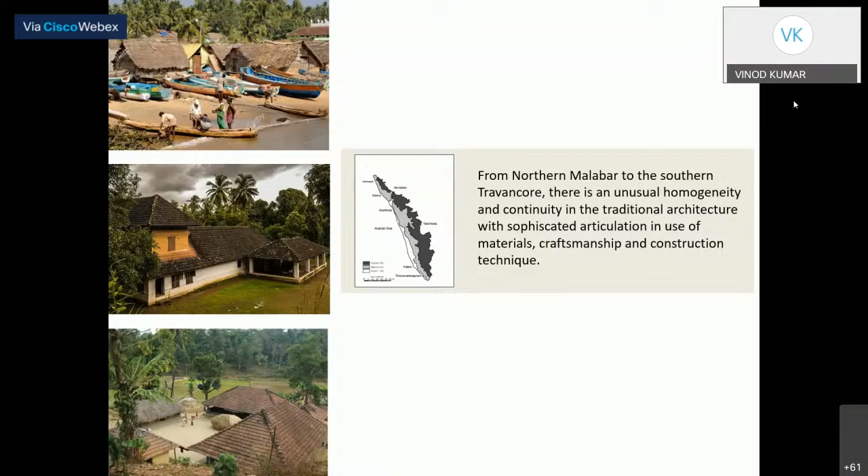And if we go from Malabar to Travancore, there is a continuous continuity in tradition. Of course there are variations with respect to materials used, but we follow a general common pattern. We also had a very clear picture of monsoon, almost 110 days a year, which followed certain patterns. Today we don't have such strict patterns because of climate change, but yes, it's part of our lifestyle and culture.

And sacred groves were part of our landscape, and it's also kind of giving space for human beings. So we give space to spirits, we give space to animals, plants, whatever. So it's just giving some space for people or for things to exist.

This we had done long back, 2002. This particular grove in the picture is from Ravi Varma's place in Kilimanoor. It's a huge compound where there is a very interesting grove. And this is again a temple. It's to show the temple landscape where you can see the groves and landscape, or the structure which fits into the landscape well.

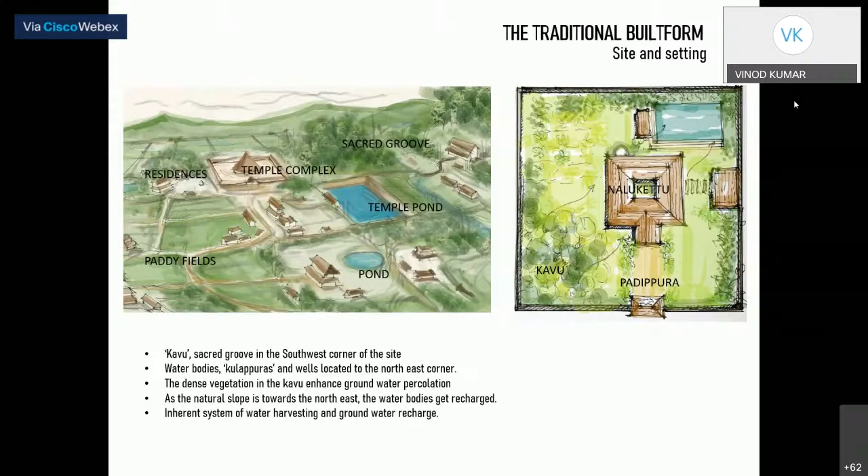And this is a typical structure of how we were planning. The sacred groves used to be in the southwest corner of the site, water bodies in the northeast, so that it allows a natural filtration and recharging. So all these things were kind of inherent in our planning systems. And it's the same whether you talk of a village or a residence. It's the same kind of planning system which they followed. It kind of integrated with the human population.

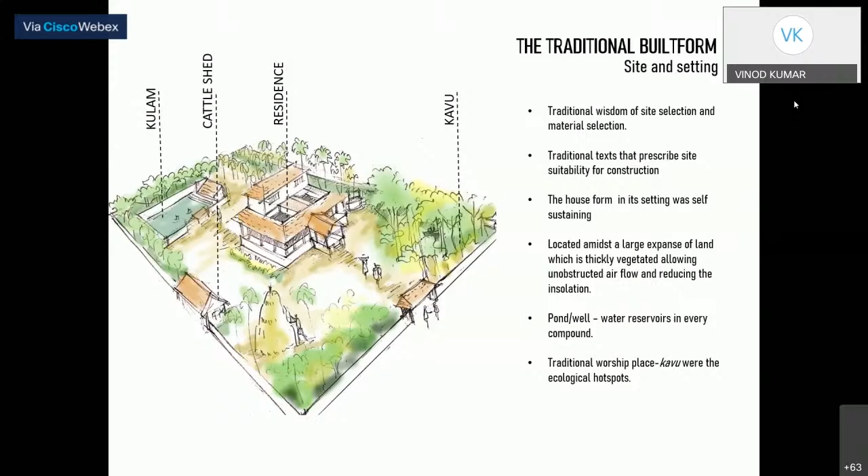We had clay tiles, granite. These were the basic materials. Now, when you talk of tile roofs, the Mangalore tile is only 150 years old. So we had thatch before that. We had country tiles. So we can't really say that the Mangalore tile roof is Kerala architecture. It's mostly come from Europe, but still the form, the slope, these are things which were there earlier too.

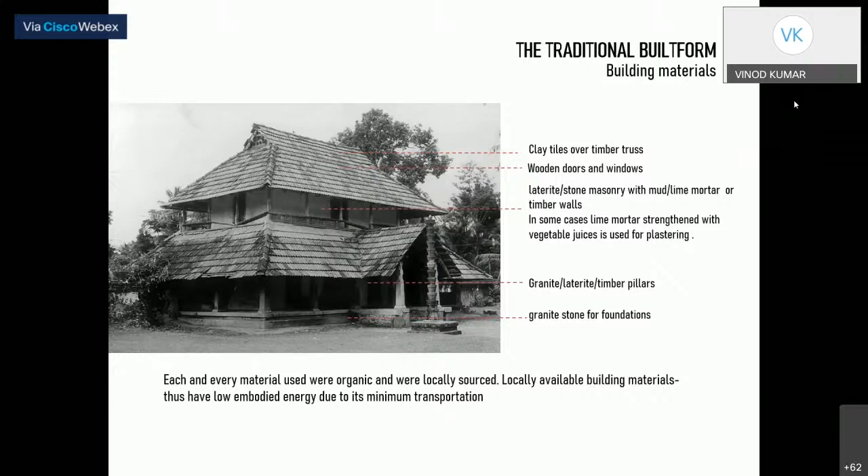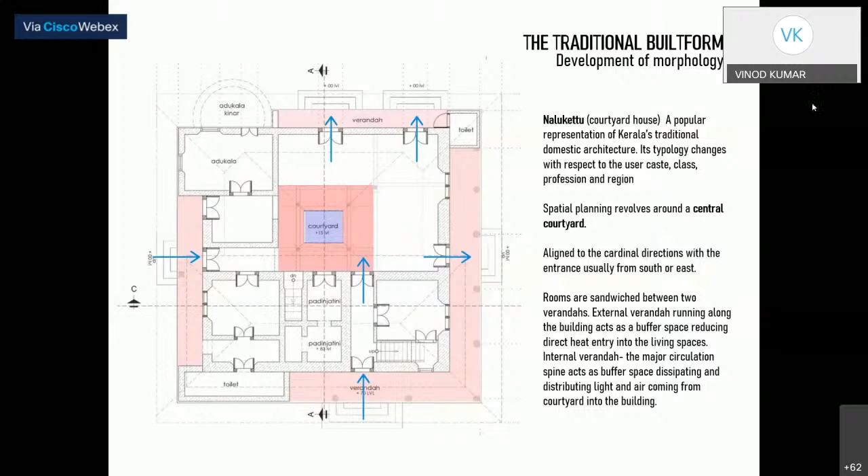And we had proper hierarchy, and then there were systems of flow. Sometimes courtyards were there, sometimes courtyards were not there, but still it allowed the breeze to flow, to protect the house from overheating. So these were natural systems which we followed while building. And you can see this is one house which we had documented: Ekasala, Dwisala, Thrisala. I think these are things which you all would be knowing. So we had systems where the design took care of natural flow of air and breeze.

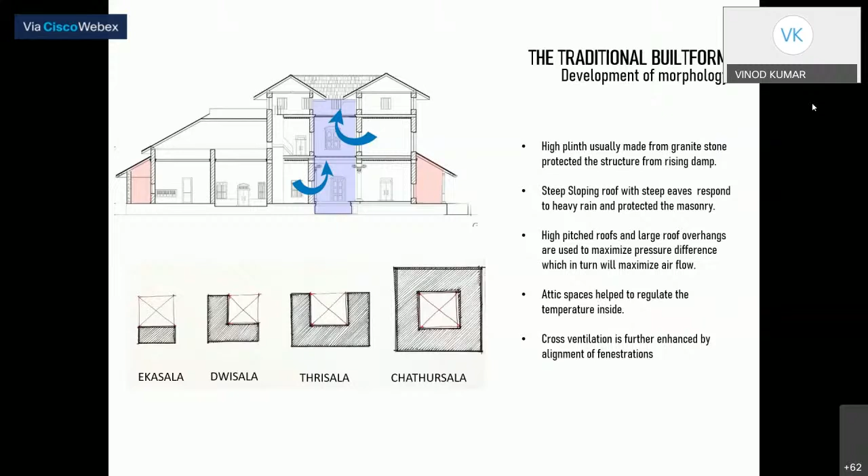And this is one house which we had documented, and you can see it helped for the natural flow of air, breeze, and how it went along with nature.

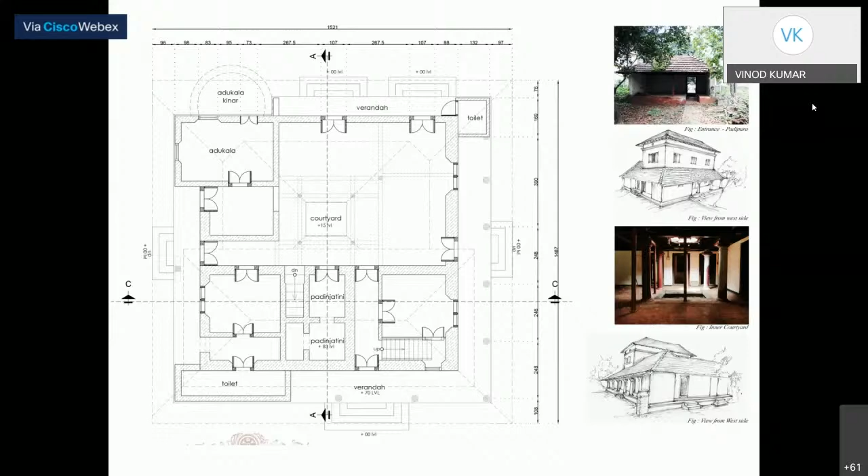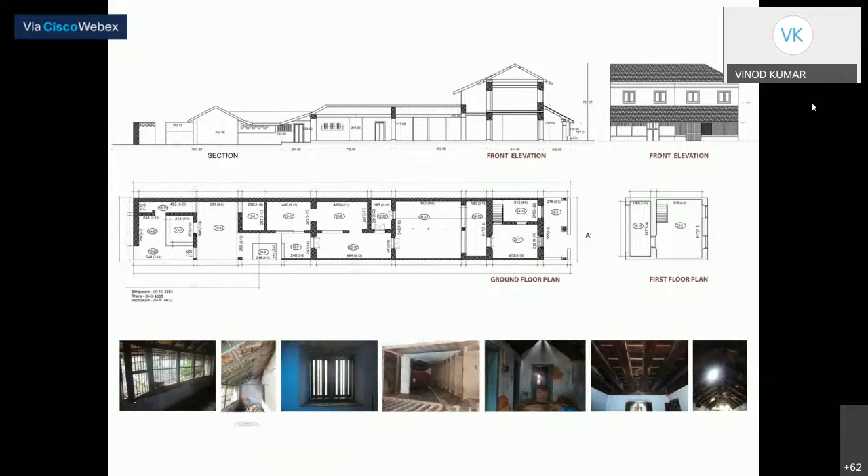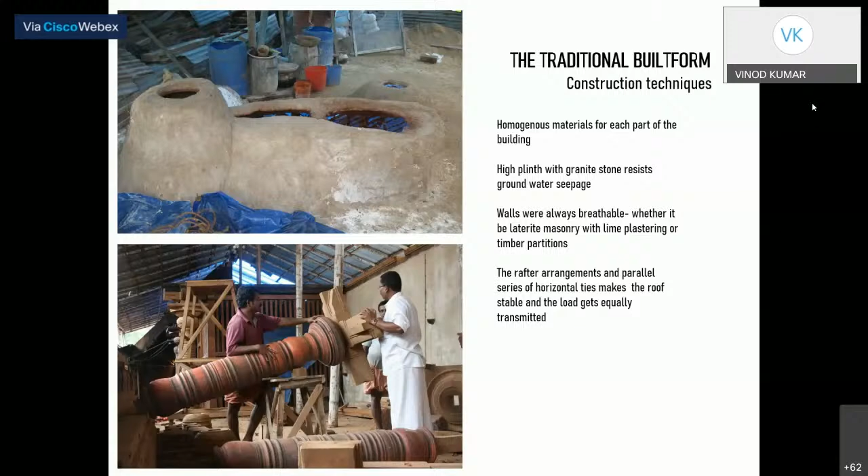We had verandas, attics, wooden lattice, these beautiful kulappuras which allowed the breeze to flow in. Even small things like handrails allowed the breeze to flow in. Being very high in humidity, it was important for the air to flow. I think allowing the flow of air was the most important thing. And shades. These are very basic things of climatology, which our traditional buildings followed pretty well.

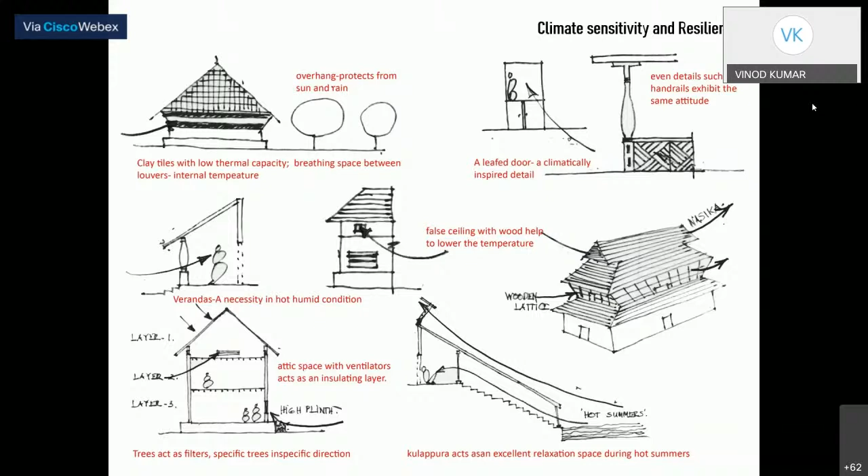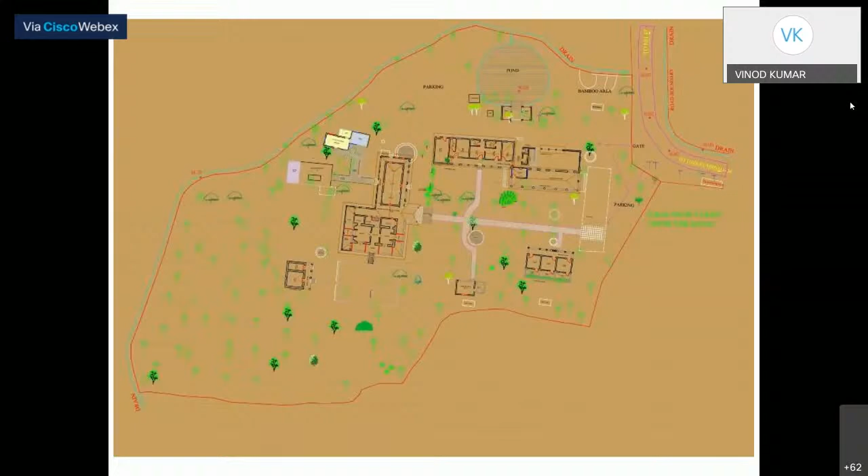Okay. And now we come to the problems we had because of climate, because of our own carelessness, things like the flood which Kerala experienced for 2 to 3 years. Why or how that flood happened is something which we need to look at. After the floods, what was the impact? We could figure out that the traditional structures fared better than many of these modern buildings. Even buildings with laterite and lime fared far better than a lot of modern structures.

And what are we building now? How is it being built? It's something which we all need to question ourselves. Are we meant for such buildings? Is our state meant for such buildings?

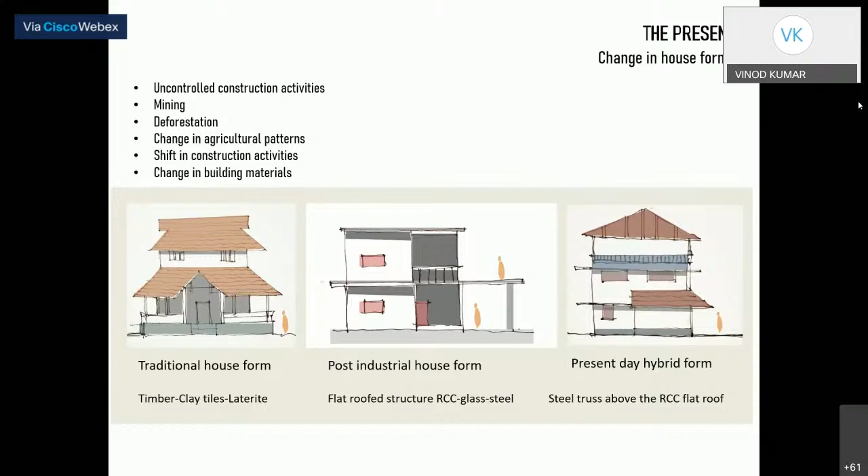How do we say we will have a sustainable future? What are the things which we can do? It is something which we should learn from the past, from our systems, which we have to learn. And now I come to some of the old examples and things which we already spoke about.

A courtyard with a, this is a Mullattaran, nammal parayunndu. It's a jasmine plant, which again adds fragrance to the courtyard, and you can see the shading and the light and the breeze which comes into the house.

This is a mana called Swarnath Mana, and this is Shaktan Palace, which we did early in 2002 to 5. We did the landscape of this place, a heritage garden, where personally I got introduced to the plants and the landscape of Kerala for the first time. And we had planted almost 500 species of plants. And I guess that's again something which you all should think at the bachelor level, where the students can be introduced to the plants or the landscape of Kerala.

The building, and this is part of the landscape. These are some of the seatings which we had done as part of the project in 2002 or 3. And we had a group of sculptors working with us, including people like Wilson and Alex Matthew. And after the project, many people thought it was built during Shaktan Tampuran's time, which was a compliment for us.

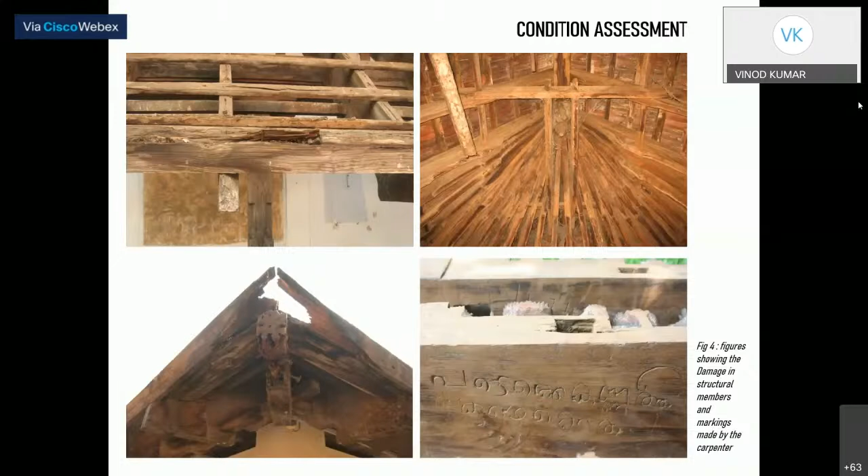And you can see some of these, like, the sculpture was covered by lime. So when we removed the lime, we could discover the sculpture again. Many such things happened, and you can see the traditional tools. Why I'm showing these things is, how much do our students learn these things? And again, what is our understanding of traditional architecture? It's something which is very critical.

I think we do documentation in colleges, but we hardly do any detailed analysis of the documented structures, or of the traditional spaces we had. What happens many times is we do the documentation or practice traditional architecture, and directly we start building Nalukettu, or we start copying the old structures, and then we don't develop. So we have to learn from what was there, what kind of spaces they created, and what functions they served for that population, and then we have to build for our time and age. I think that's very important.

And this is a section of the temple complex. You can see laterite, lime, then again stone is used, copper is used. So this is a typical section where you have timber, copper, lime. These are the materials, and it's pretty sustainable. When you're talking of climate change and sustainability, I think it's very important to understand.

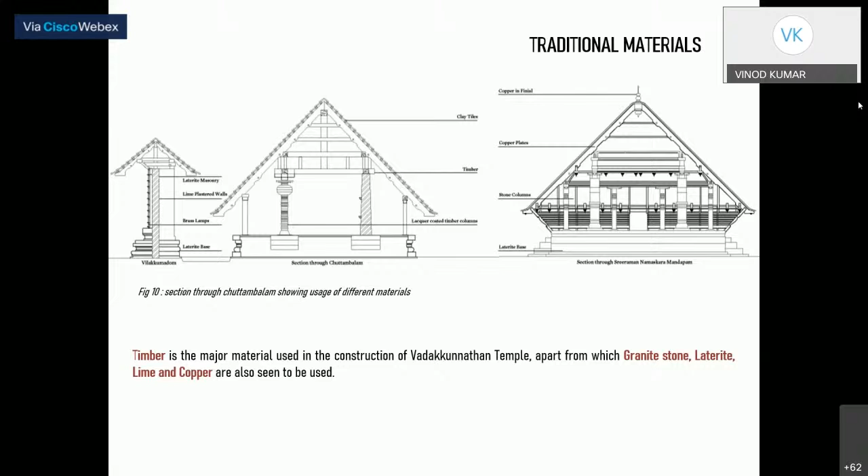Okay, now when we talk of things like lime, this is lime. India still has a lot of lime, but all the lime is being taken by cement companies, which are huge. So finally, when you go to the market and look for lime, you might not get lime, or you might not get lime workers who are skilled enough to work with it.

It's become super expensive. It's around, I would say, 1 to 10 times. If you can do something with cement in 100 rupees, lime has become 1,000 rupees. So how many people can really afford it? So something which was so simple, so common in our land, has become uncommon or rare. I think this is something which we have to really look at.

And again, when you work with lime, a lot of these old lime structures, it stands 600 years. We still have houses which are 250 years old. Many of the cement structures, we still have not done enough research on cement, but a lot of structures we see are breaking down in 30 years, 40 years. So we need to do more research on these materials.

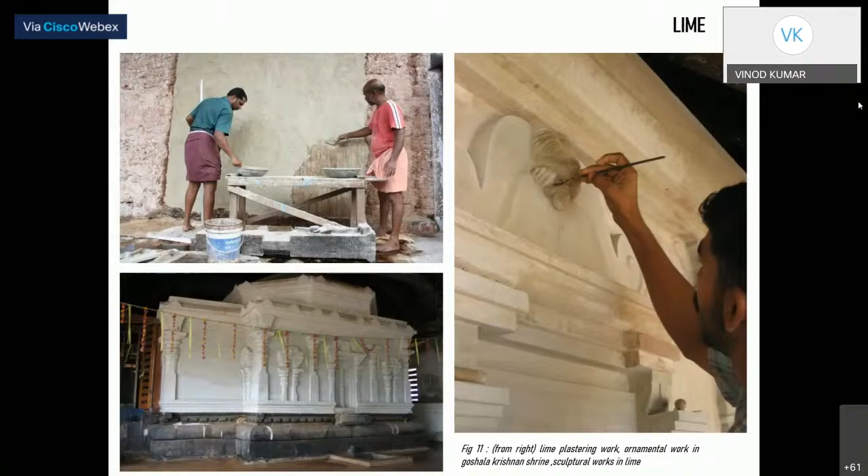One thing is for sure, lime is a breathing material, and it allows air to pass through. It's more comfortable, it's more eco-sensitive. So these are definite plus points for the lime. And this is how we made it. We had people who knew how to collect the raw materials. Some had to be collected from forest kind of lands, and then mixed, and then you keep it for 15 days, and then finally after that you start using the material.

So this is a know-how which our villages or our people had, but sadly we don't have it anymore, or things become easier. It's just like how you make an Ayurvedic medicine. Now for making an Ayurvedic medicine, you may have to get ingredients, mix it. Ideally you have to make it at home and then prepare it. Now you go and buy a paracetamol. It's something which you can just go to the shop, pay 10 rupees and buy and eat. But if you say which is better, it's a question which we all need to answer.

And this is copper, how copper was used. You can see we had reused old copper. And copper again, it's a material which was used in Europe in the 13th, 14th centuries. So when we did a bit of research, we found that a lot of copper has come from Europe in these old structures. But now in the green architecture, what we try to follow, they say copper is a very green material.

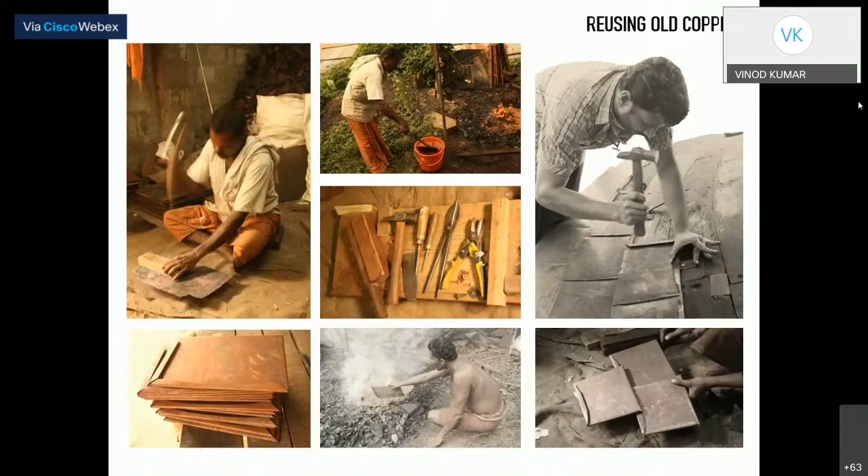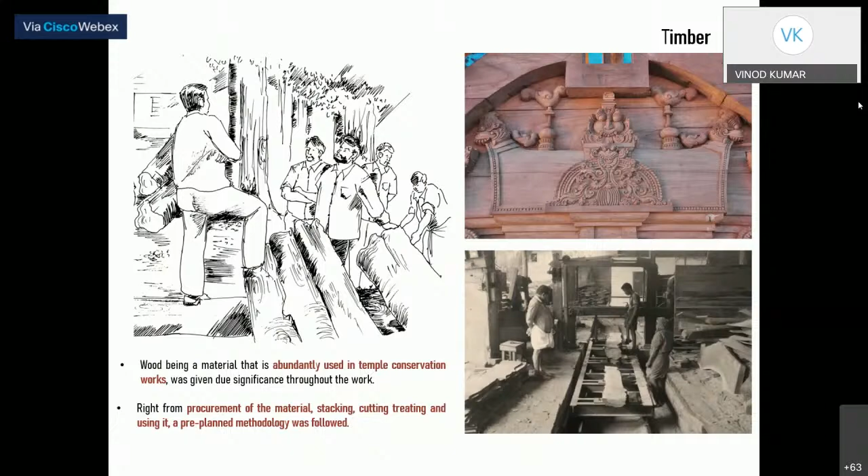And this is how wood was brought down to mill, and it was designed with timber. And this is how we worked with the local craftsmen. For this whole project, we worked with almost 500 craftsmen or 500 workers, most of them traditional workers. So I think such projects are important also for the knowledge to be intact.

Unless and until we give them work, they will get into other works. Even without giving, they are getting into concreting, or they're getting into contracting. So unless and until we sustain the workforces, we lose the technology also.

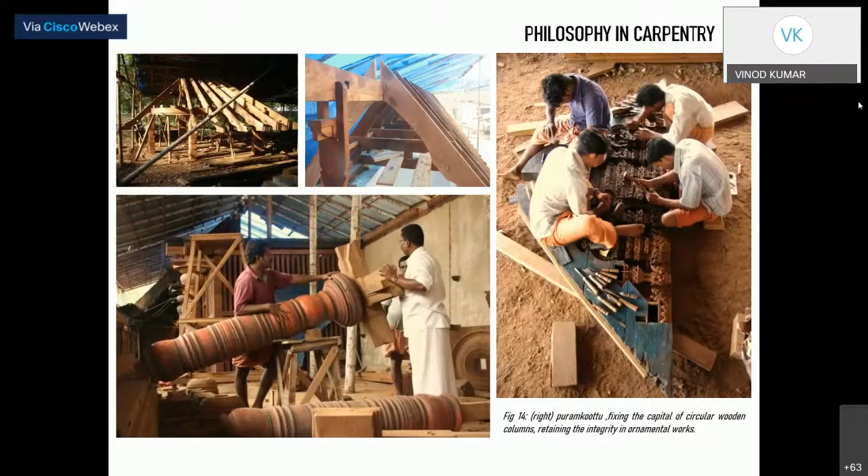And these are the roof structures. Many of these carpenters are also not there anymore. There was a person called Tankamani Ashari who was the main carpenter when we started the work. He's not there anymore. So as the time goes on, we are losing people also. So it's very important to document them, to see how much of it can be conserved. And this is a sculpture in the roof.

And this is a protective oil for the wood. Just like how we make vegetable oil or coconut oil for the hair, there is a system of boiling, and you add things like turmeric and many other ingredients, and then it's used as a protective coat for the wood. And this is a very local, it's a local knowledge.

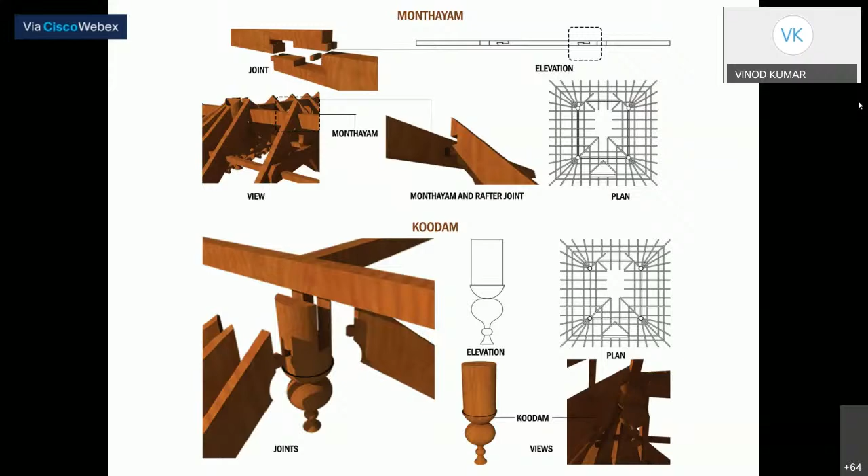And we don't learn it as students of architecture. We don't learn it enough. I think it's something which is highly important, because we are also losing structures. That's also a reason. And this is again a structure which we have already lost. It's a temple near Thrissur, Ayyanthole, and someone just told me, okay, they're pulling it down, why don't you come and take a few photos? So we just went there, did a very basic crude documentation, whatever we could do in 1 or 2 days, and it's brought down. The structure is brought down, and they're trying to do this structure with RCC rafters. Why, we don't know. What's the need? We are not very sure.

So finally, this is a structure. If architects themselves are not very much aware, if the students are not much aware about these structures, we cannot expect the PWD engineers or the Devaswom board engineers to be aware. So I think it's the first job for architects to be aware, to understand what the whole heritage was about, what the local plants or trees were about, before we can expect the public to understand.

This is again a structure we luckily could save. It's a Paranur Palace, something close to the Paranur Temple, where someone like Asha teacher, Asha Lata Thampuran, told us she heard from somewhere it was getting pulled down. Then as we went and saw, we saw all the workers and people who had come to buy this, because the temple board already had put it for lelam. So we also became like one of those lelam people who went there, found out the price, and they were selling it for 80,000, 1 lakh, and it's a 250-year-old structure, not documented.

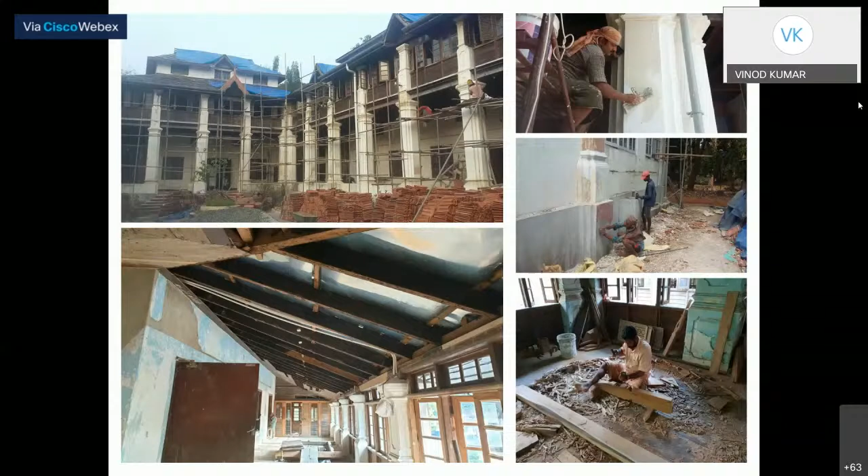And this is after the entire structure got restored. It got inaugurated this year, January 1st. And this is the final picture, one just before inauguration.

And if this was not done, why am I showing this as an example? You can have hundreds of examples where even conservation is not done in the right way - you paint over structures, you use enamel paint, and instead of lime you use cement, and you use ceramic tiles. So how to restore an old building is also something which we need to learn as architects.

Yeah, I think... yeah, and I would just like to let the slide be there. I'd just like to continue for some 10 minutes, 5 to 10 minutes before we take any questions. So one thing is like... I think maybe I'll take out the slide and just put my face.